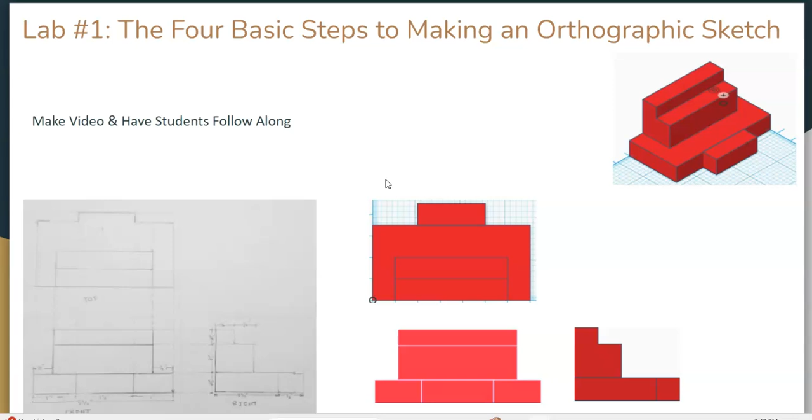So there are 4 basic steps to making a sketch. The first step is that you have to determine the views necessary to portray the object and then block out the views using construction lines. Visually, that's going to look something like this.

After you block out the views, then you're going to complete the object details using extension lines, and that is going to align pretty well with what we have over here. So this covers the blocking, and then we're going to use extension lines over here to highlight the parts that we need to trim out and how they align with the other views.

So once we have our extension lines taken care of, we know what parts we need to trim out. And that brings us to this part over here. We're going to erase the light construction lines and reveal the true scaled shape, which is essentially this. Once we have our shape ready to go, then we add all the dimensions. And that's essentially how it works.

So again, based on the description given, if we were to put this in order, I would say you go 3, then 1. Again, you're going to block it. You're going to use the extension lines to get all the details out. You're going to trim the extension lines, and then you're going to add dimensions.

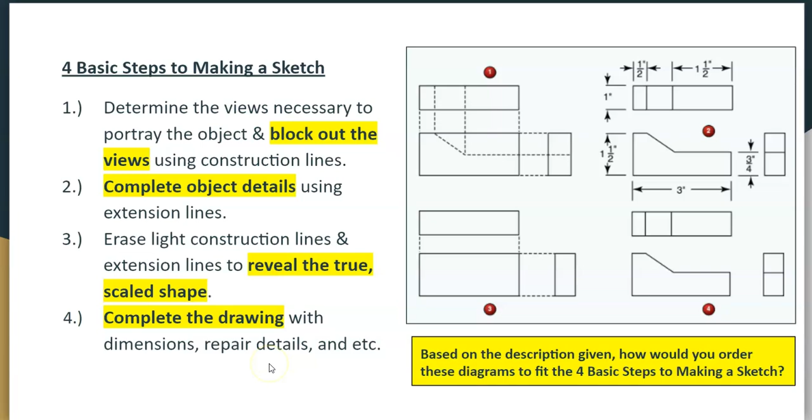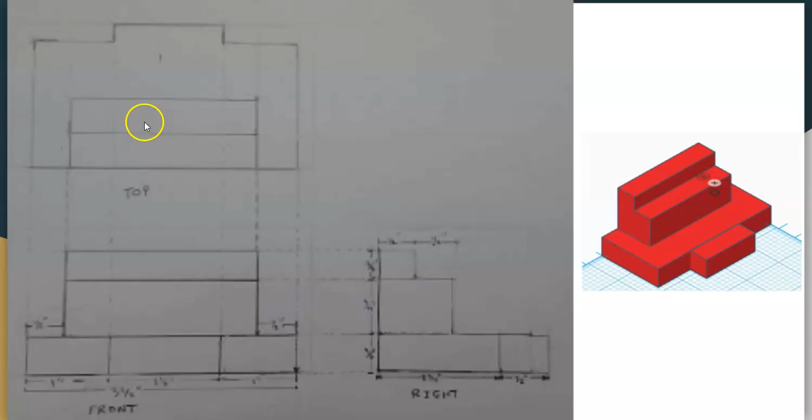So if that was as clear as mud to you, let me give you a real-life example of how this is going to work. We're going to take this object and turn it into this. You're going to notice that this object is going to require 3 different views. We're going to need a front view to cover this face right here as you're looking at it from the front. You'll need a right view to cover it coming from this direction, and you'll also need a view from the top to see what this looks like.

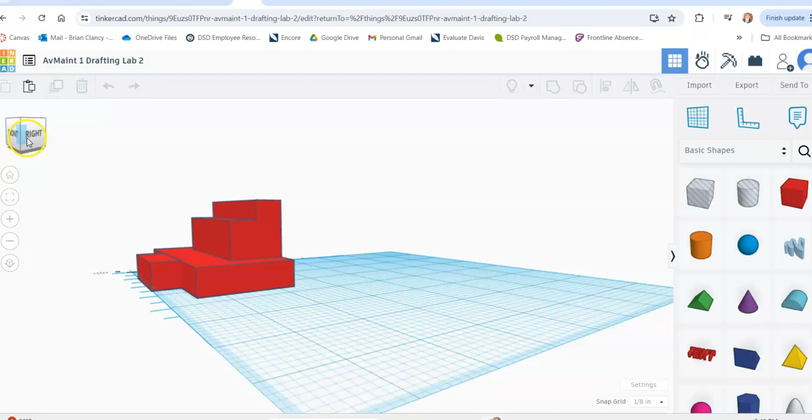Let's bring this to real life for a second, and I'm going to show you the actual object. So right over here, we have this awesome object. And again, we have 3 different views that we're going to draw on this. We're going to start with our front view. There we go. We're going to start with our front view.

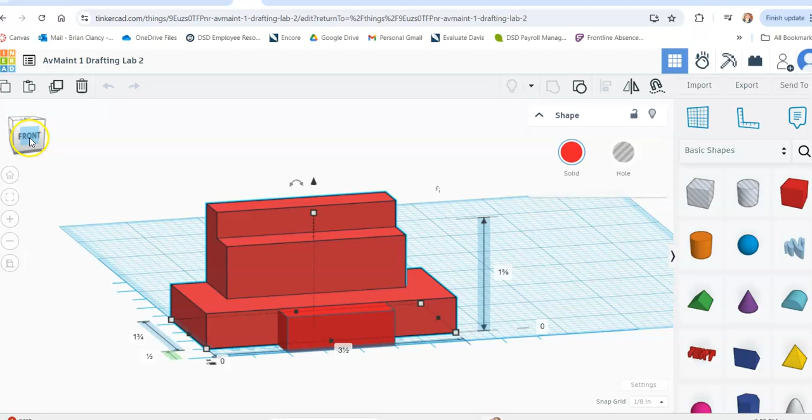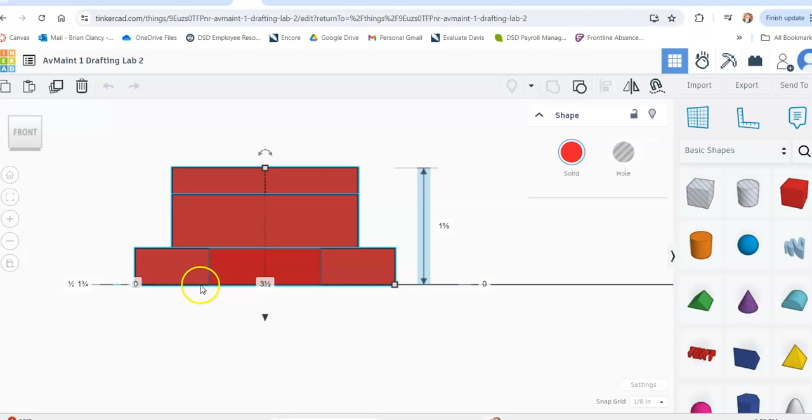And now that I've adjusted my settings real quick, I know that to block out this front view, we're not going to actually get these edges out yet, but just come up with a big square, just like we did over here, that covers this entire area. We need to create a square that's 3.5 inches by 1 5/8. Okay, so let's get started on drawing these views.

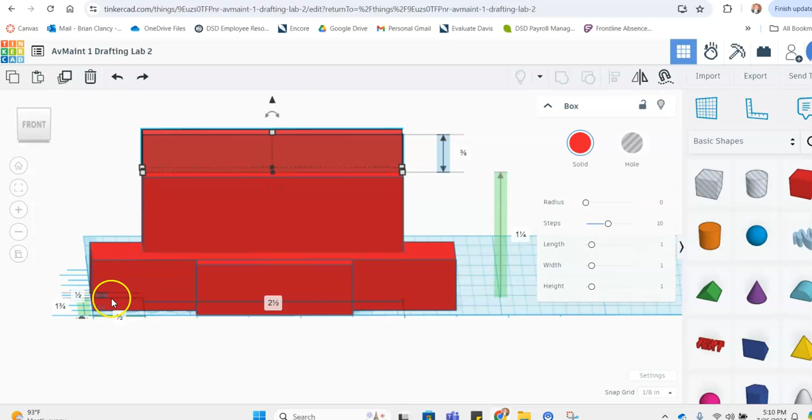So I'm going to go ahead and get started with our front view. Again, if I take a look at this from the front perspective, what I'm going to see is that I got 3.5 inches here, and then over here 1 1/4 plus 3/8 is going to be 1 5/8. So I have a 3.5 inch by 1 5/8 block that I need to draw out to block out this particular side. So I'm going to do that over here.

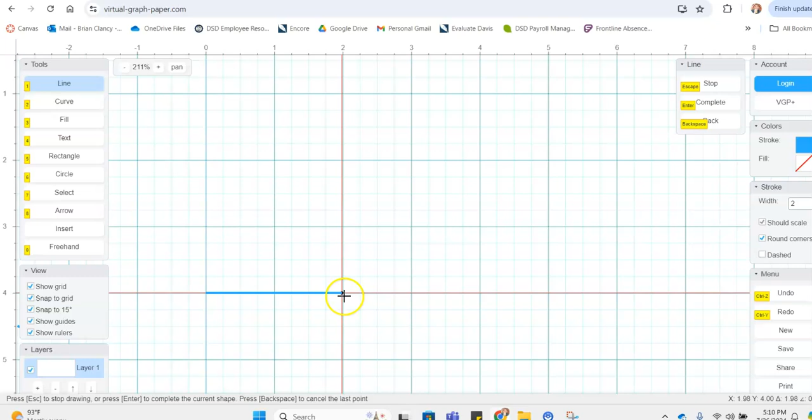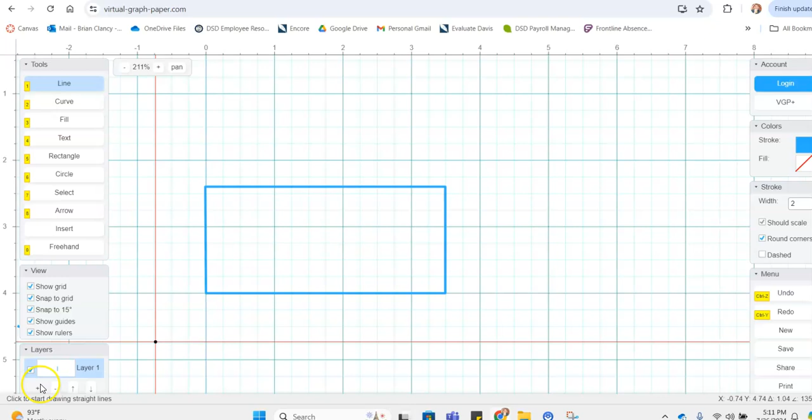Each of these major grid lines counts as 1 inch, and each of the minor ones counts as 1/4 inch. So I need to do 3.5, so that's 2, 3.5. And then I need to do 1 5/8. So that's going to be about right here. Slap it across over here, and get back down over here. Okay, awesome. So now that you've seen how I do that, I'm going to continue to do that for the other shapes. So now you can see that I've blocked out my 3 views.

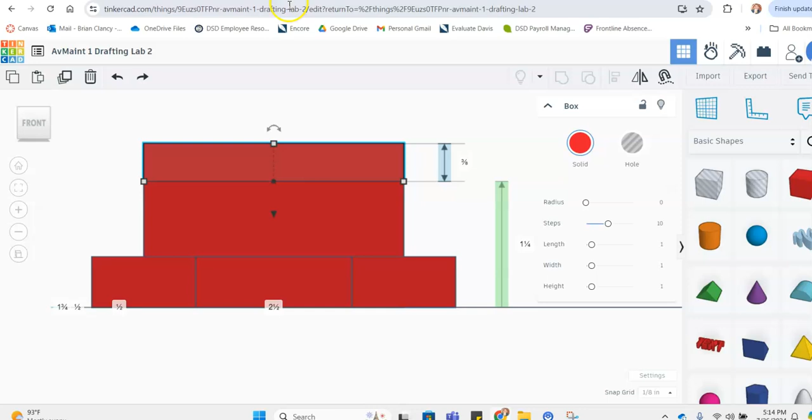This is going to be my front, this is going to be my top, and this is going to be my right. To show you how I did that, with the front, like I explained earlier, I know that I have something that's 3.5 inches wide by 1 5/8 inch tall. So I'm going to make a block that encapsulates that view. And I've done that over here. Again, 3.5 inches wide and 1 5/8 inches tall right here.

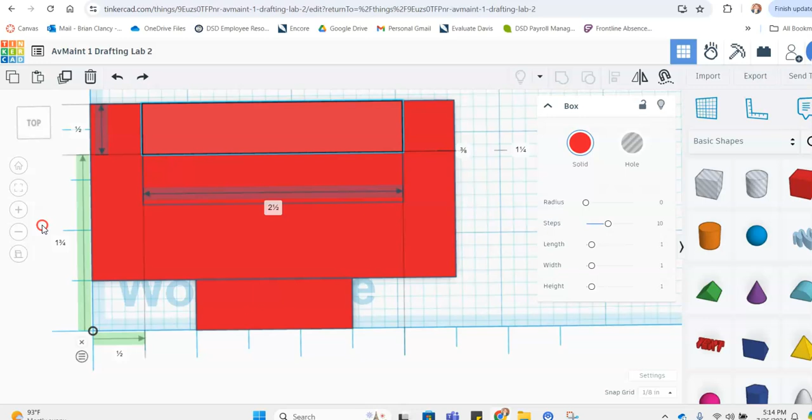So then if I go to my top view, what I'm going to see is that I have something that's 1 3/4. Sorry, not 1 3/4. That's 1 3/4 plus 1/2. So that's 2 1/4 inches deep, and again the same 3.5 inches wide. So I carried that 3.5 inch width up here, and then just made a 2 1/4 inch depth over here. So that gave me that block, and then if I go over here to my right side,

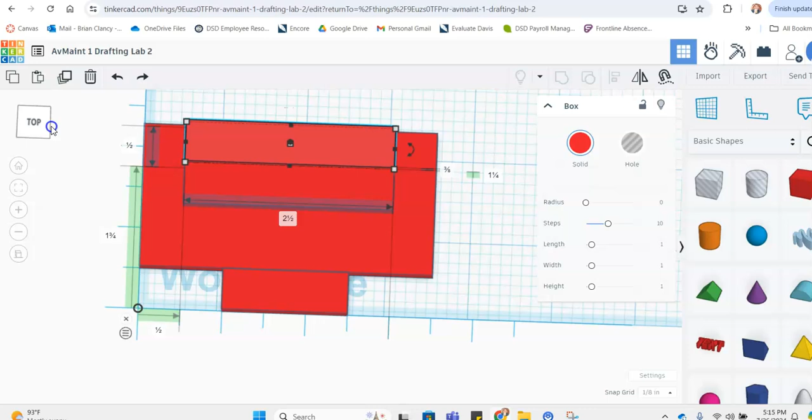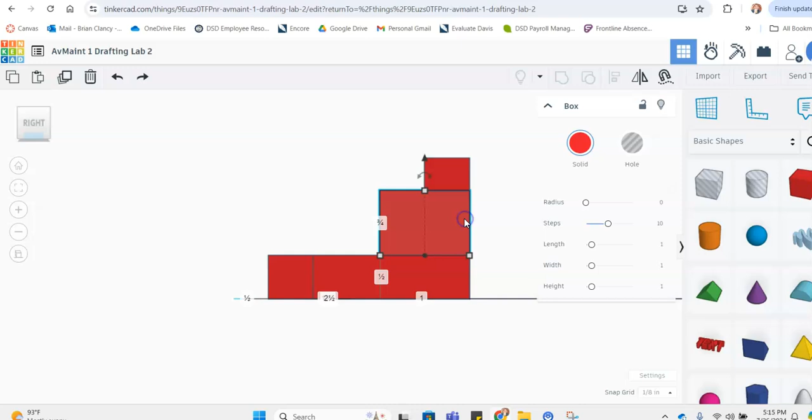what you're going to see here is that I have something that's, let's take a look over here. Okay, so that's 1/2 inch thick, that's 3/4 inch thick, and that's 3/8 inch thick. So that's going to give me that 1 5/8 again, which parallels pretty well with this. And then in depth, I'm looking at 1/2 inch plus 1 3/4 for that whole width. So that's going to give me 2 1/4 for width right here. So great, I've blocked them out.

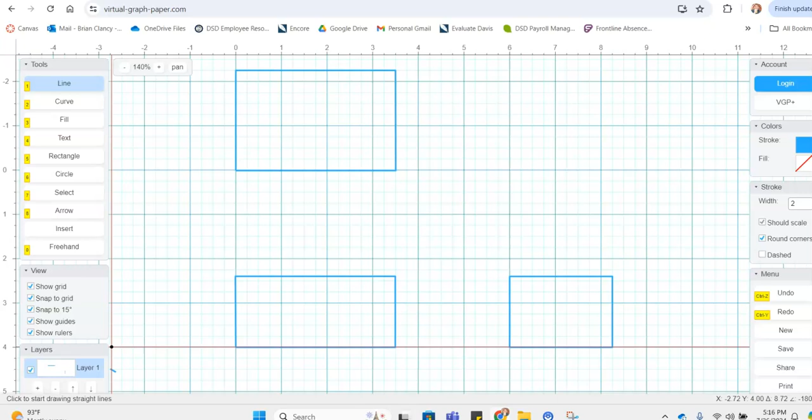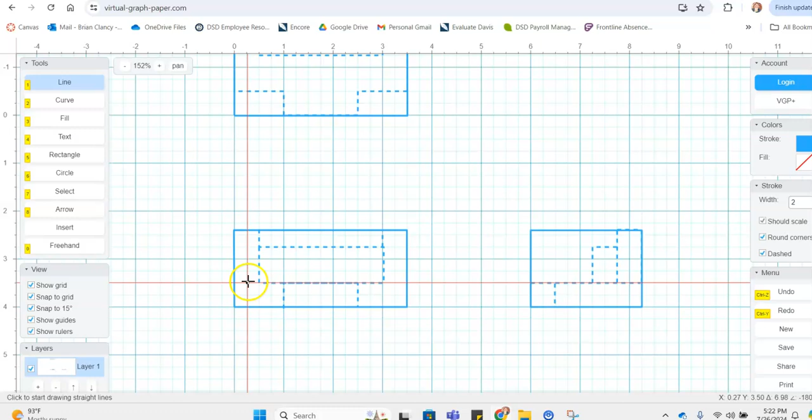Now, the next thing I need to do is set up the construction lines. Okay, now that we blocked out our view over here, what we need to do now is use construction lines to give out the more specific details, where the lines go and everything of that nature. So I've already pre-done this for you over here. Again, you can see that this is the front view, and that these match out pretty well. Except I forgot to add this part right here. It's okay, it happens. Now everything's looking good there.

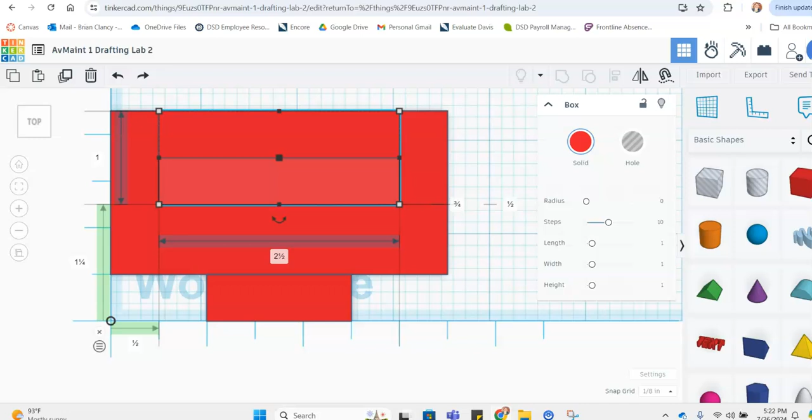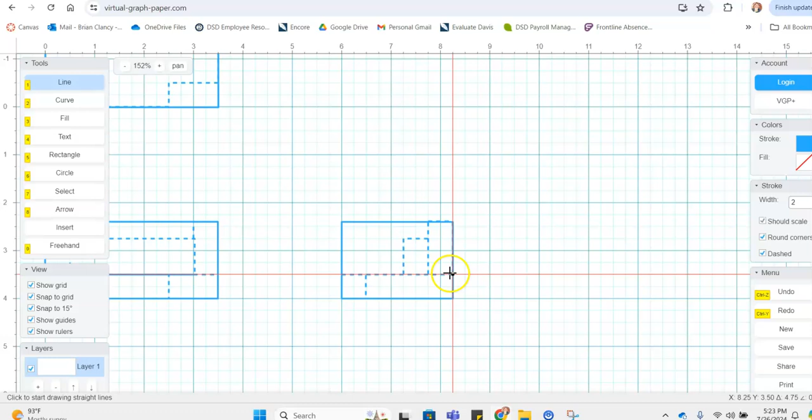So our final step will be to trim everything out and get the shapes that we're looking for, and then to add dimensions. Okay, now that we've deleted our construction lines, we're left with our basic orthographic shapes. So there you have it. Once you're finished with that, all you've got to do is add the dimension lines, very similar to what you see over here.